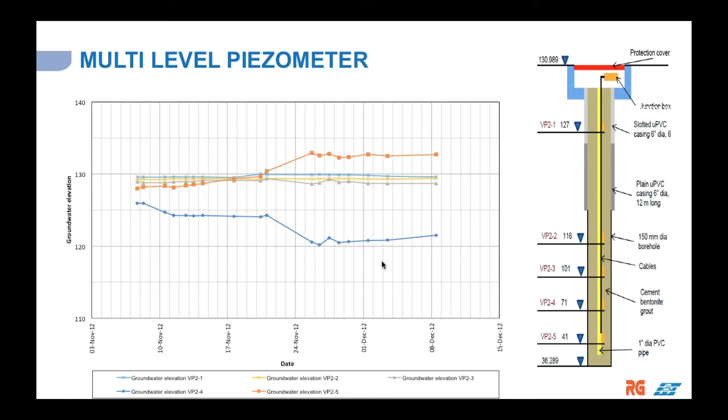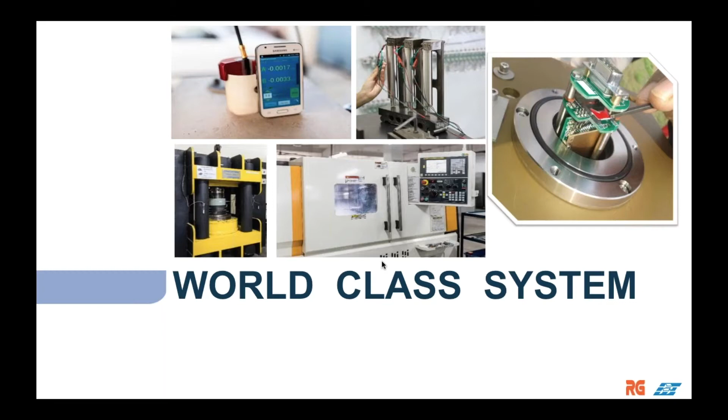Our sensors are world class. India has great expertise in manufacturing. You all must have read that iPhones are being manufactured in India. Encardio-rite is the only company in this field that provides complete in-house solutions. We manufacture our advanced data loggers, sensors, and have our own proprietary database.

We are the only company in the geotechnical space to sell sensors that are electron beam welded, ensuring that the sensors work endlessly. Few of our sensors have been providing data for over 25 to 30 years. One of the other big advantages of our sensors is that we can supply them without cable if need be. The cable then can be joined on site once the exact length of the cable is determined.

We all know one reason for failure of sensors can be bad cable jointing. With this unique technology, the risk of bad cable joints is done away with. On the right, you can see an image of our electron beam welding machine used for welding our sensors.

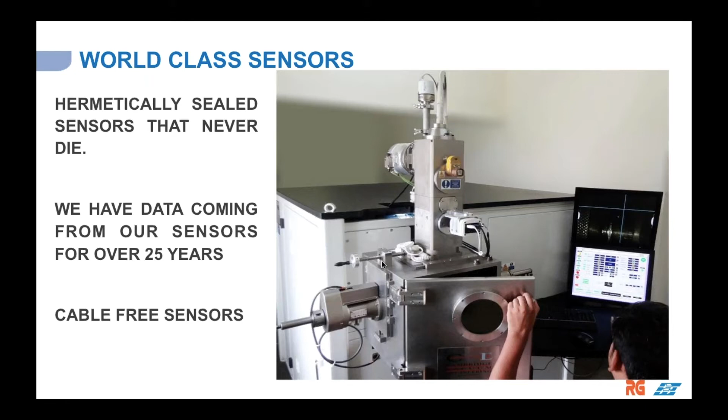Coming to our data logger, Encardio-rite has the most advanced digital data logger. It is a compact, brick-sized box. Our digital data loggers come with two-way communication. You can sit in the comfort of your office and reconfigure the system or set alarm values. There are four ways of data transmission.

The data can be transmitted to a remote server using GSM GPRS modem or radio frequency, or alternatively, you can download the data via Bluetooth on your mobile phone or using a serial port on your laptop. We also provide multi-channel data loggers, which can be used for multi-level piezometers.

The power supply is versatile. The data loggers can be operated through a 12-volt external power supply, battery, or even solar panels. Battery life on our data loggers lasts up to 4 to 5 years, keeping in mind that we acquire 4 readings a day and transmit that data once a day.

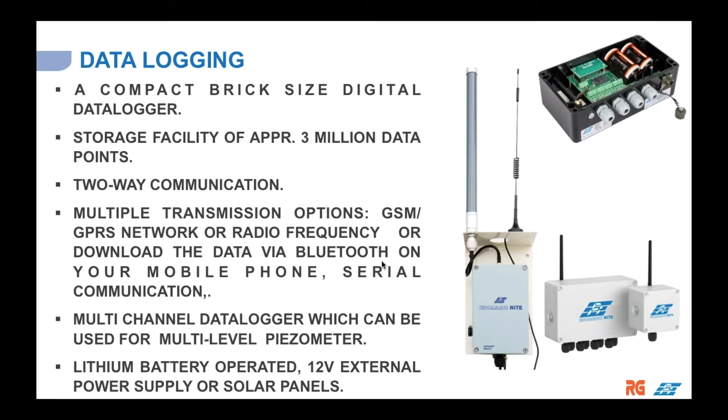In our systems, we have done away with the vent tube, resulting in a completely sealed sensor. The vent tube had two disadvantages. They used to get clogged, and the desiccant needed to be changed frequently. The need for a vent tube was to compensate for the effect of atmospheric pressure on water level. By adding a barometric pressure sensor, the need for a vent tube was dispensed with right away, giving an almost maintenance- and hassle-free system.

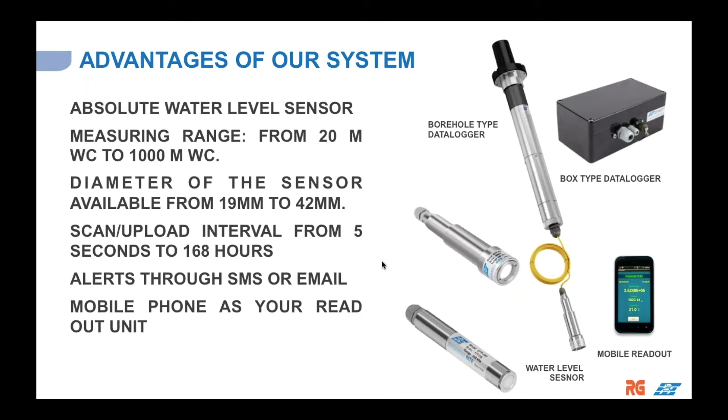The most important groundwater parameter measured is water level or water table. However, for proper monitoring of groundwater resources, online web-based monitoring of the following parameters is also necessary: water temperature, water conductivity, water flow or discharge, and rainfall. Our system has the capability of integrating all these in our sensors.

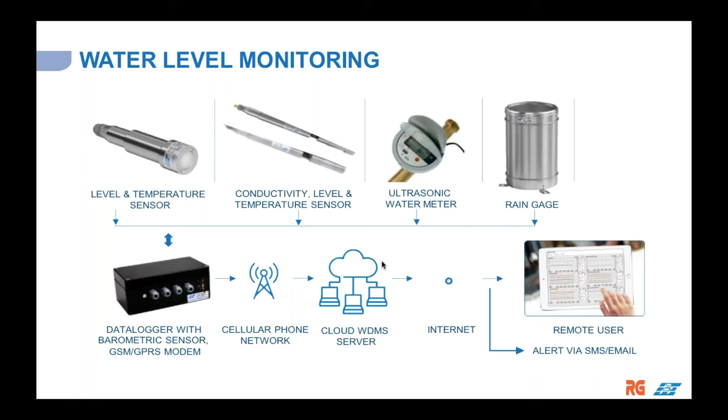As we know, around 3% of water on Earth is fresh water. About 69% of this is locked up in glaciers and ice caps. 30% is found as groundwater, and 1% is accounted for in lakes, rivers, reservoirs, or the atmosphere. Groundwater is one of the most important sources of fresh water. It is fast disappearing. Groundwater therefore has to be judiciously used and also recharged. The data shown indicates the groundwater at this location has depleted by almost 8 meters in the past 6 years.

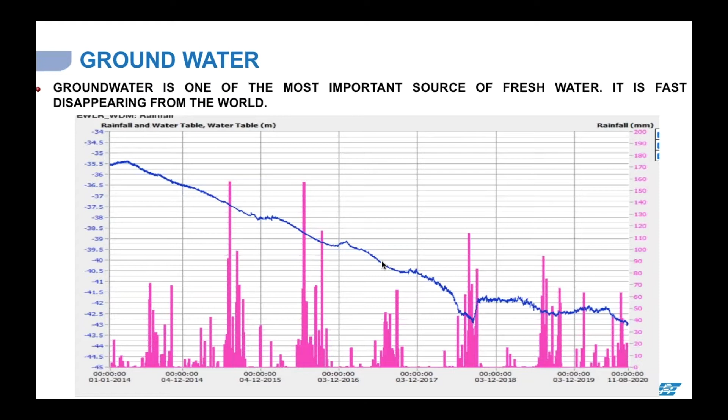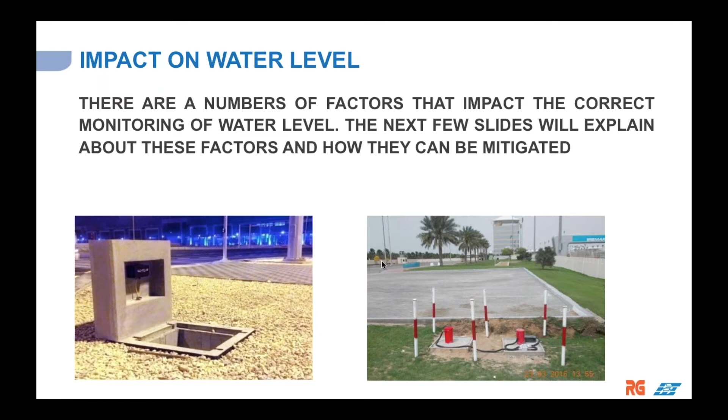For monitoring the effectiveness of these plans for reduction in water consumption, conservation and regeneration of water resources, it is essential to comprehensively map, measure, and monitor the extent of both subsoil aquifers and surface freshwater reservoirs, as well as to recharge them during rainfall. There are a number of factors that impact the correct monitoring of water level. The next few slides will explain these factors and how they can be mitigated.

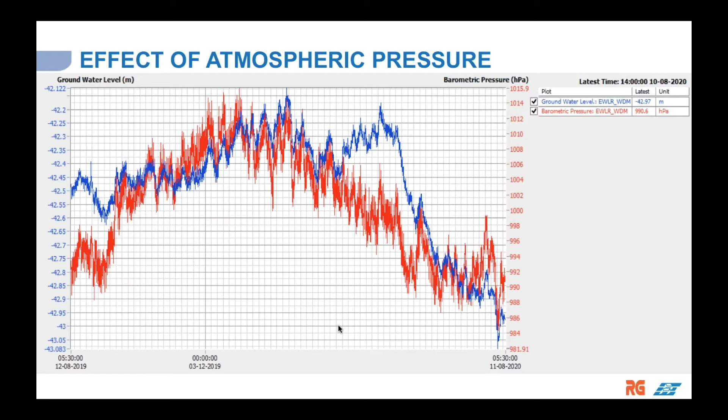This graph here shows a weekly variation of atmospheric pressure. It has been seen that even on a weekly basis, atmospheric pressure can vary up to 200 mm water column level. One can therefore imagine the kind of impact it has on the accuracy of monitored water tables.

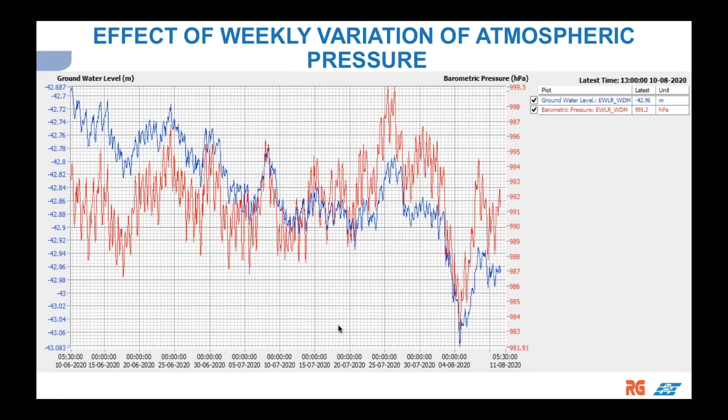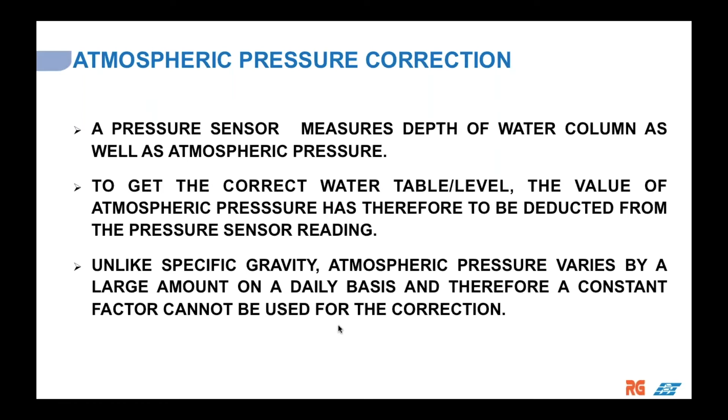The output of water pressure sensors is also affected to some degree by the change in temperature of the water surrounding the pressure sensor. This behavior is called temperature drift. However, for groundwater monitoring applications, temperature drift is not very relevant, as for groundwater at a depth of more than 10 meters, the change in temperature is typically less than 1 degree centigrade for the entire year.

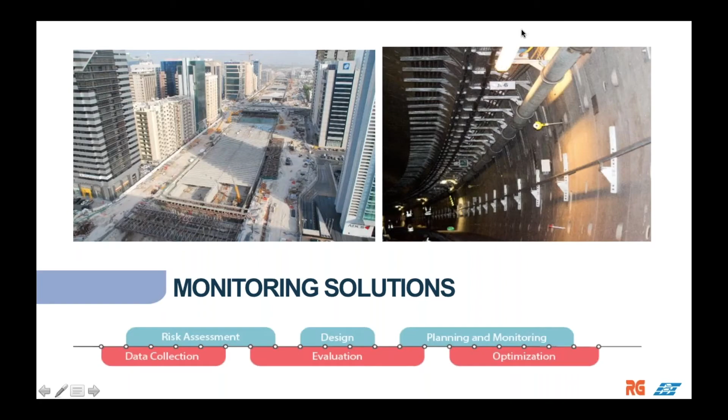In this part of the session, we will share on selection of the range of sensors, a few case studies, data management software features, and a live demo of the online system.

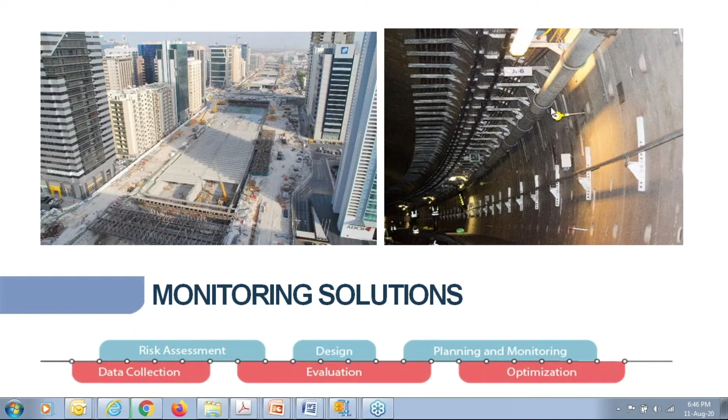Continuing on water level measuring system, we now address an important aspect on selection of range of sensors. When you are referring to any requirement specifications of water level recorder, it would generally state as a digital water level recorder, non-vented type, having a measuring range of 0 to 120 meter with sensor cable and suitable for a borehole depth of 120 meter, along with accessories like junction box, cables, battery operated data logger, telemetry system based on GSM GPRS, complete as per the technical specifications.

If you see here, it says that the range of the sensor has to be 120 meter as well as the depth of the bore well also is 120 meter. The measuring range of sensor should be based on the actual depth of installation of sensor and not on the deepest point of the borehole in which it is supposed to be installed.

The actual depth of installation of sensor should be based on the maximum change in water level expected, and it may not be the deepest point of the borehole in most of the cases. Using a sensor of high range based on borehole depth than what is required will compromise the accuracy of the readings.

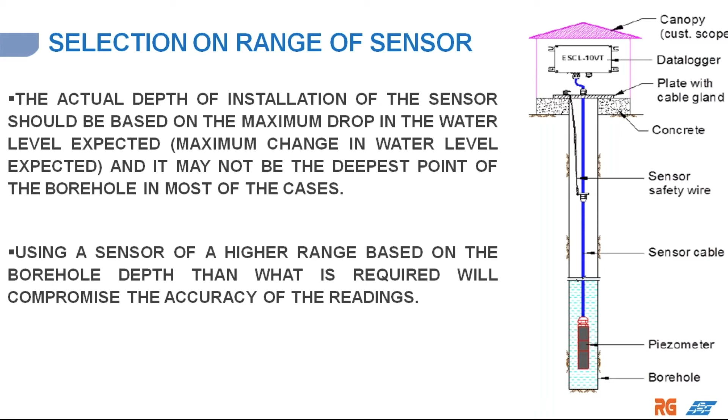Let's have an example. The maximum drawdown expected in a borehole of a 100-meter depth is 15 meters. Accuracy considered is plus and minus 0.1% of the full scale range. In that case, selecting a 1 megapascal range piezometer based on the borehole depth will result in an inaccuracy of plus and minus 100 millimeter of water column, which is 5 times worse than the inaccuracy of plus and minus 20 millimeter, which one would have got using a 0.2 megapascal range piezometer, actually suitable for the application.

If you see the table on your right, row 5, depth of construction is mentioned as 111.6 meters. Water level pre-monsoon is 3.8. Water level post-monsoon is 3. Tentative depth of installation of DWLR is 8.8. We can right away select a measuring range of 0.2 megapascal range piezometer and achieve a good accuracy.

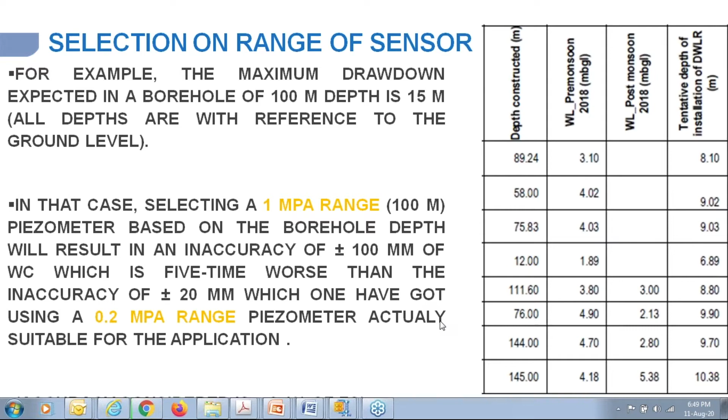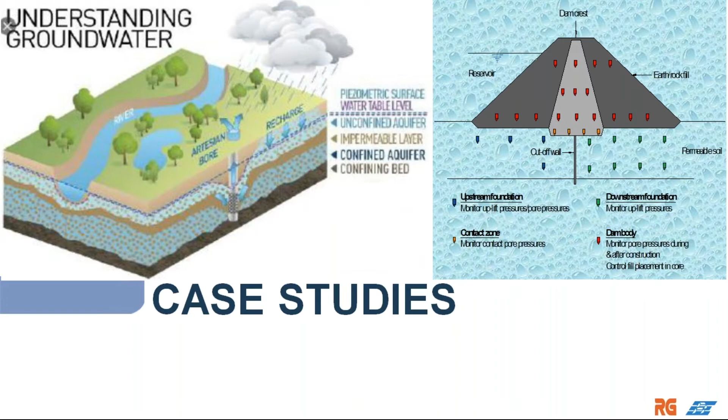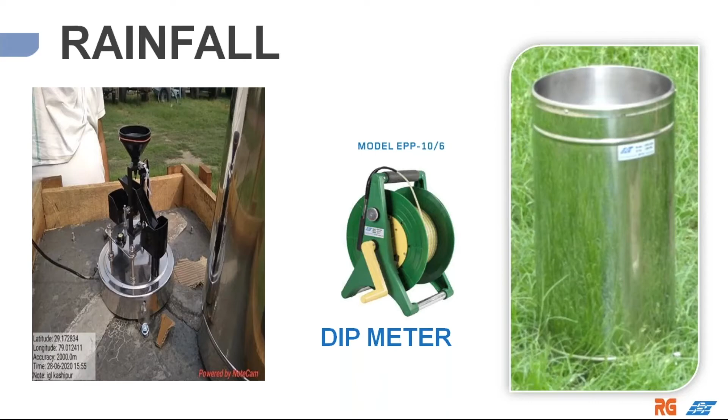The other interesting fact to note is that aquifer may not get recharged immediately after the monsoon. However, it will depend on number of factors. Generally, water seeping down in the unsaturated zone moves very slowly. Assuming a typical depth to water table of 10 to 20 meters, the seepage time could be a matter of minutes in the case of coarse boulder, to months or even years if there is a lot of clay in fine sediment. Under saturated conditions, the water might move a lot faster. Other factors include the configuration of the wetting front, the unsaturated storage, temperature, and the hydraulic gradient.

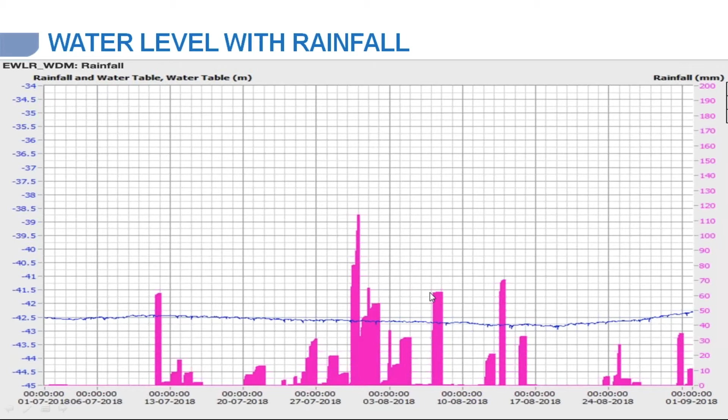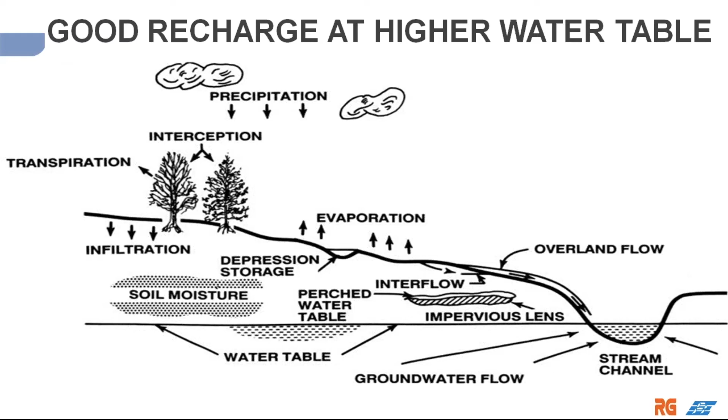Good recharge at a higher water table. In one of the regions, areas with higher water table show a different trend in water level variation. It was observed that the water table reached its original level after each monsoon. Groundwater table variation and water temperature from two different locations with higher water table are shared here. For this particular site, the data is shown for a period of 2 years, and for this particular site, the data is for a period of 3 years.

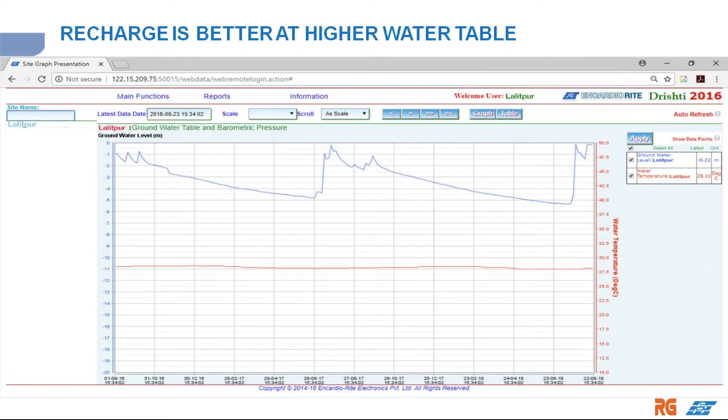A rise in water level is seen prominently with the advent of rains at both these locations. It shows that the rainwater recharges the subsoil aquifers and recovers the water table completely in this region. This implies that the recharge is better at higher water table.

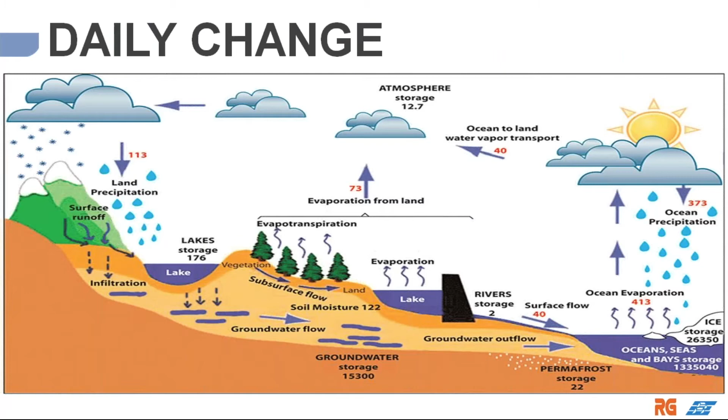The data was recorded 4 times in a day and transmitted once in a day. From the hydrographs, it is interesting to observe the daily variation in water level during day and night. The water level goes down in the day by around 3 to 5 meters due to high consumption and recovers at night. This gives important information about the aquifer in that region. The fact came to light only after the installation of the DWLR, because earlier the data was taken only once in a month.

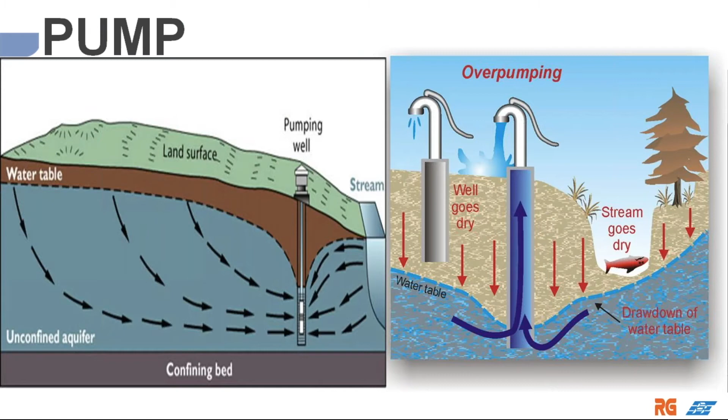Pumping of the water. The online data from an automatic water level recorder installed in one of the farmhouses gave interesting information. This observation well is very near to active water wells used for pumping groundwater. The rapid water level fluctuations recorded are due to the pump cycling on and off. You can see here there is a water fluctuation, and this is all because of the pump cycling on and off at the nearby producing well.

The water went down by almost 7 meters during pumping. However, this level was back to original within 2 to 3 hours. Both these factors can be seen clearly from the slide, which is for the 7th day as well as on the 3rd day.

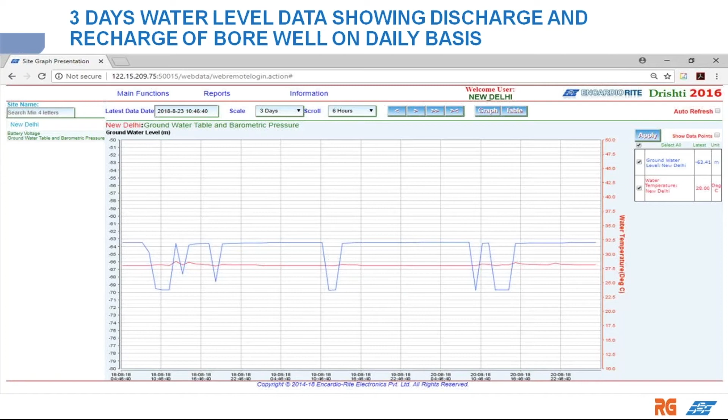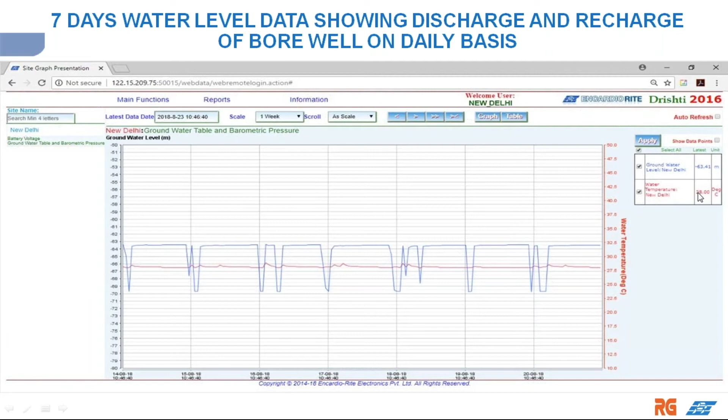The other interesting observation from this data is that water temperature at this depth remains almost constant. Even if you see the first slide of 3 days data, the temperature shown is 28 degrees. On the 7th day also, the temperature, the red one, shows 28 degrees. The same borehole after 15 months, we can see the temperature is still close to 28 degrees.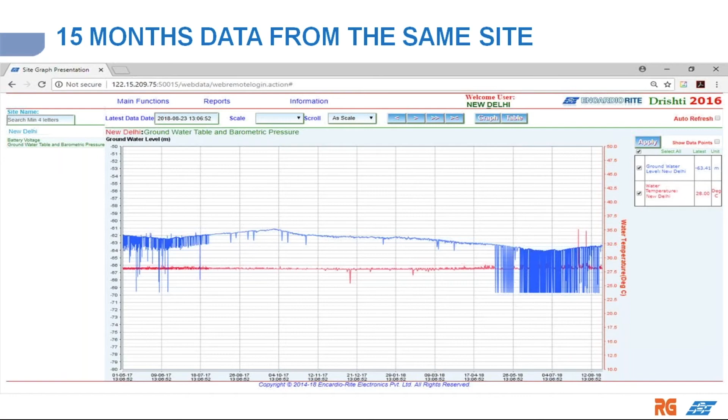Now we come to the presentation and reporting of the data. Data is normally presented as pore water pressure versus time, drawdown versus time, groundwater level versus time. The graph here shows change of water pressure against time in deep and shallow piezometers installed at one of the underground projects. The height of water head above the sensor tip measured using a water level sounder has been converted into a pressure.

The values displayed here are all in kPa. So the value of the water level has been converted into pressure. And this is the duration, the time frame. 1 meter of water column equals approximately 10 kilopascals. And here we are trying to show the change in water table or water pressure from two different piezometers. One is at the deep location, the other one is shallow. The blue one is the deep location, and the red one is the shallow.

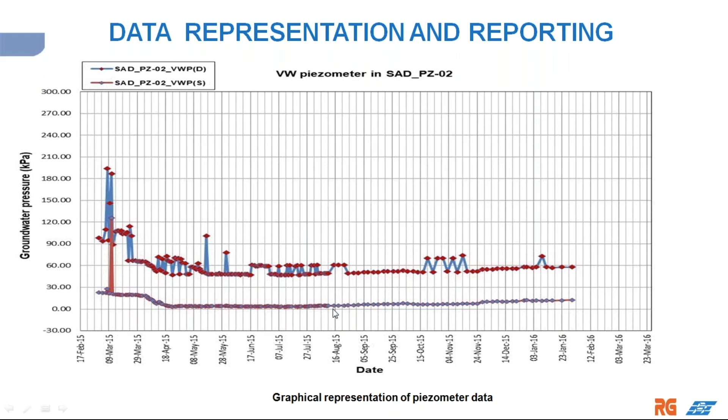The graph in this slide shows the change in drawdown with time in the observation well installed outside the excavation area of one of the underground projects instrumented by us. It also shows the variation of water level with time, recorded before the start of the dewatering activities. On your right, you will see a number of manual and automatic piezometers installed.

The alert and maximum allowable levels are also shown for a quick evaluation of the situation, if the user has programmed the sensor with triggering values for alert and maximum allowable. The yellow line that you see here is for alert, and the red is the maximum allowable limit. Otherwise, the user can also program it for alert, alarm, and action, the three parameters for the AAA values. The moment the value reaches any of the alert modes, the user will receive an SMS or email alert on his or her device.

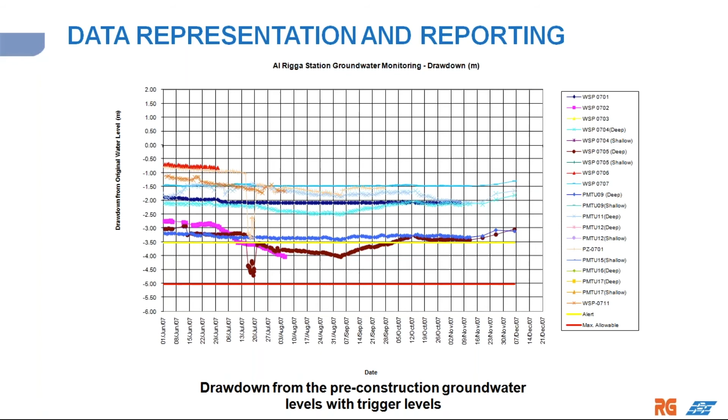Sometimes it is useful to put additional data series on the graphs on the secondary y-axis, such as excavation level, the distance of the excavated face with reference to the piezometer location, barometric pressure, temperature, dewatering discharge, etc. The choice of second parameter depends on the application. The graph here shows the groundwater elevation on the primary y-axis and the dewatering discharge on the secondary y-axis. This allows an easy visualization of the correlation between the two parameters.

We can see groundwater elevation going down as the discharge rate goes up. Here are two piezometers. Here the water level is going down. As we can see, there is a high discharge being shown. So we can have a better correlation if we have two different parameters on the y-axis, and a better comparison when it comes to drawdown.

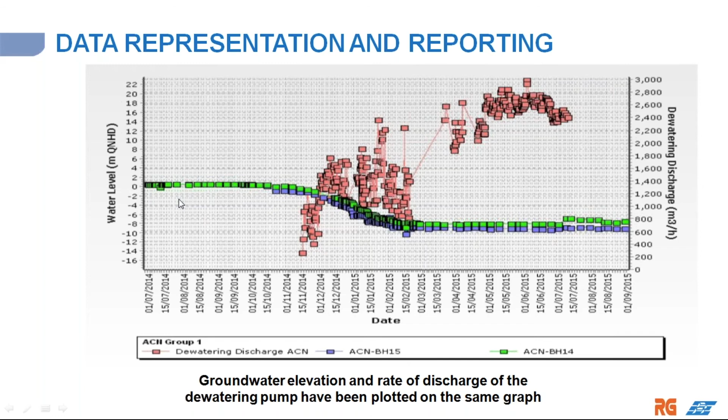We come to the Encardio-rite data management system. It's versatile and can correlate data from hydrology, geotechnical, structural, environmental, etc. We offer a complete online cloud-based or local access data monitoring solution for monitoring water resources or civil engineering construction projects.

The salient features of the software: easy access to meaningful instrumentation data. Data is presented in graphical as well as numerical formats. Results are accessible on tablets and smartphones. Access to different sensors on one screen. Combined charts in one report. You can have a number of combinations. Create diagrams from any combination of parameters and time period.

Multiple authorized users at different locations can simultaneously interact with the software to view any real-time data, changes, graphs, or reports. Instant alerts via SMS or email to authorized personnel, low operational cost, and user-friendly tools for day-to-day operation.

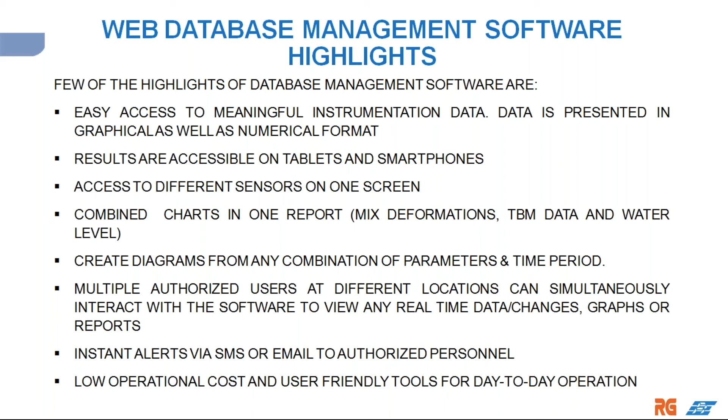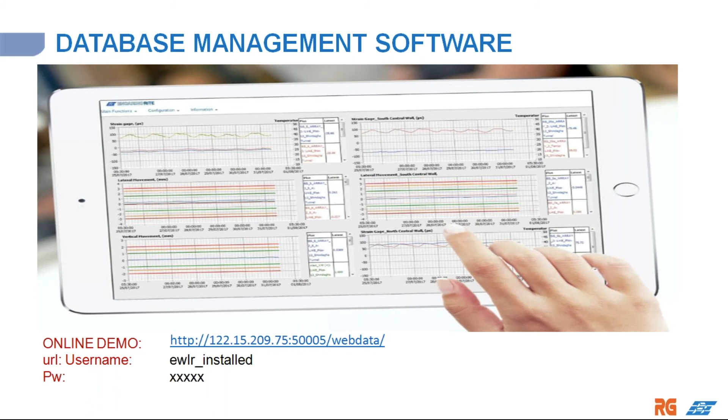Let's go online with this particular link. This is our web page portal. We need to put the username for the project, and the password will be allotted, and then we just log in. We can have any kind of information, like project images, JPG files, we can upload the drawings, and we can mark the instrumentation on those particular pictures. We select one of the locations where we want to see the change in water levels.

This is how the web page looks. On the left, you have your indexing for the different parameters to be viewed. You can see we have categorized into landslide, structural health monitoring, and water. And in water, we have segmented into change in water level, depth of water level, barometric pressure, rainfall. So let's start with water level.

What you see here in blue is the current water level, and what you see here is the temperature. Here you can see the maximum, average, and minimum values for a period of 1 week. The period is 5th August till 12th of August. This is the temperature bar. This is the change in water level or the water level bar.

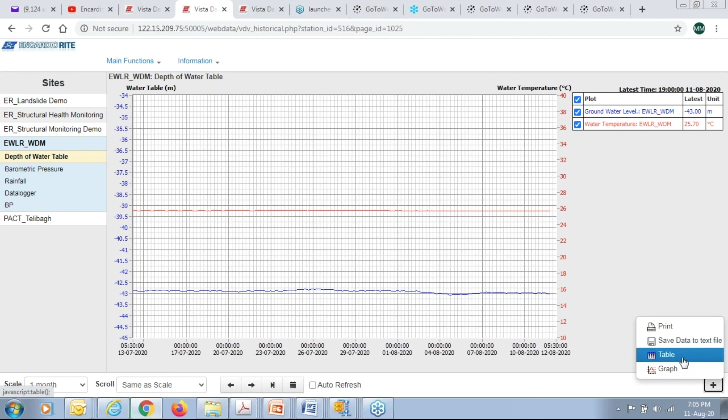The software also has a feature where you can see the tabular format, the numerical values of those graphs. You can see the data from 13th of July, water level, the temperature, and you can come down and have the data from your selection point.

Coming back to graphical values, let's change the scale. Let's go 8 years back. We'll go to 2012. And let's take the current period. Interesting figure. The water has been depleting right from the beginning of 1st March 2012 till date. You can see here, the maximum was minus 34.51 and the minimum was minus 43.08, almost a drop of 9 meters in the last 8 years. And temperature has been constant between 25 and 26.

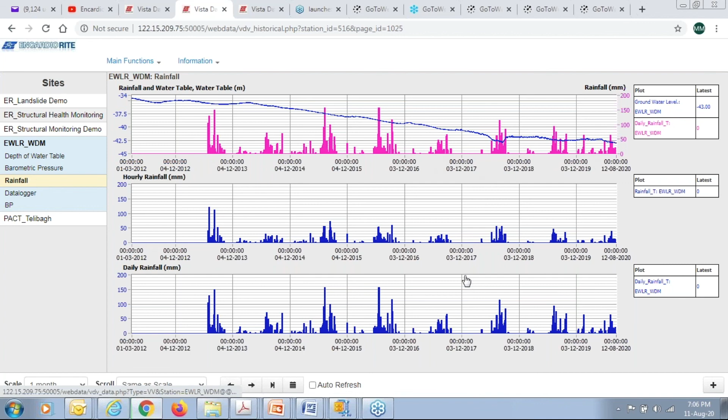Let's take rainfall along with this for the same duration. You can see this. This is water level, the drop in water level, and these are all the different years of rainfall in that particular region. Let's click on this. You can see there's only a steep rise here, but the rest of the time the water has been dropping.

You also have a feature of either saving the data, printing it, saving a PDF file, or emailing it. For whatever period you select, you can have everything available at the touch of a button.

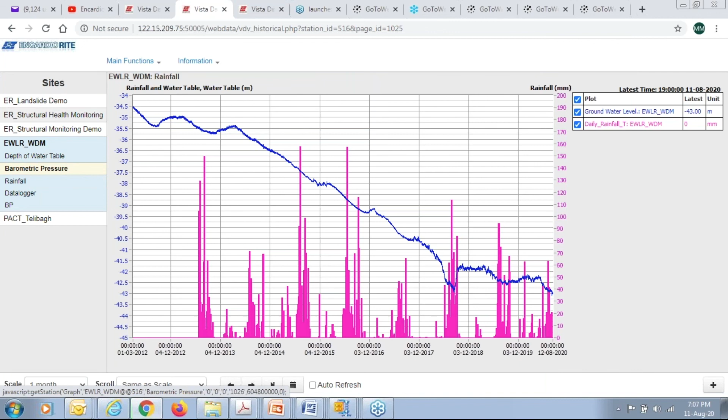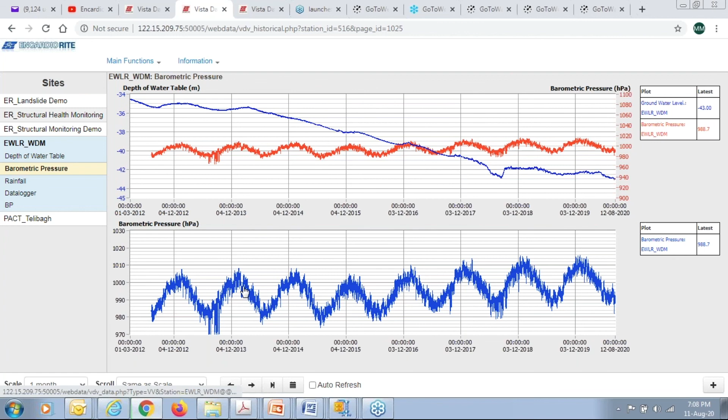Let's take barometric pressure. Here is a scale again for the last 8 years. You can see the same water level, but you can also see the change in barometric pressure. The bottom slide is also of the same period. The only thing is we have changed the scale of barometric pressure. Here you can see it's from 900 to 1100. Here we have changed the scale from 970 to 1030. That's why you can see a larger amplitude, or larger change, in the barometric pressure.